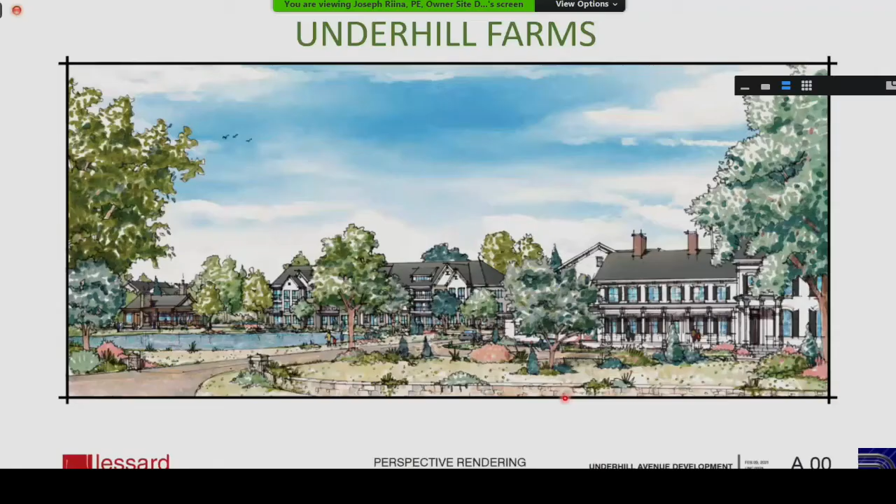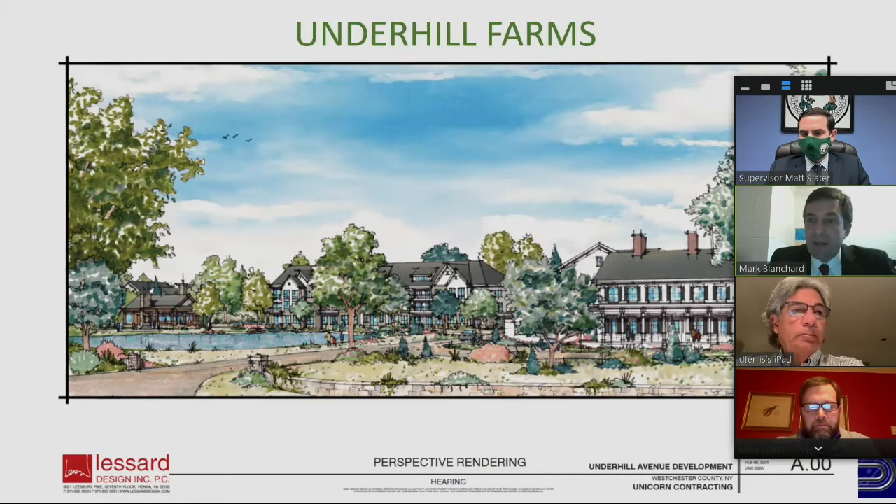The reason why I say I think it's interesting is our inspiration goes back to 2010. We're taking one of the goals that was set forth in the Yorktown Comprehensive Plan as amended and adopted in 2010. We're going to be showing you a walkable community in close proximity to the Yorktown Heights downtown business district that's meant to strengthen that district. We're going to be showing you a project that seeks to maximize the preservation of existing open space while also offering new recreational opportunities and open space that will be accessible to the public. We're going to be showing you soon some other amenities that the project is going to be offering to the town, including one very special amenity is the preservation of a locally significant historical structure.

I'm very proud to be a part of this team that's with you tonight. As Supervisor Slater stated, we have Joe Riina, our project engineer. We have Phil Grealy, our traffic and roadway improvement engineer. Christopher Lessard is our project architect. They will all be speaking. And finally, Paul Guillaro, the managing member of the project owner and sponsor, will be wrapping up our presentation with some specific project benefits and other issues.

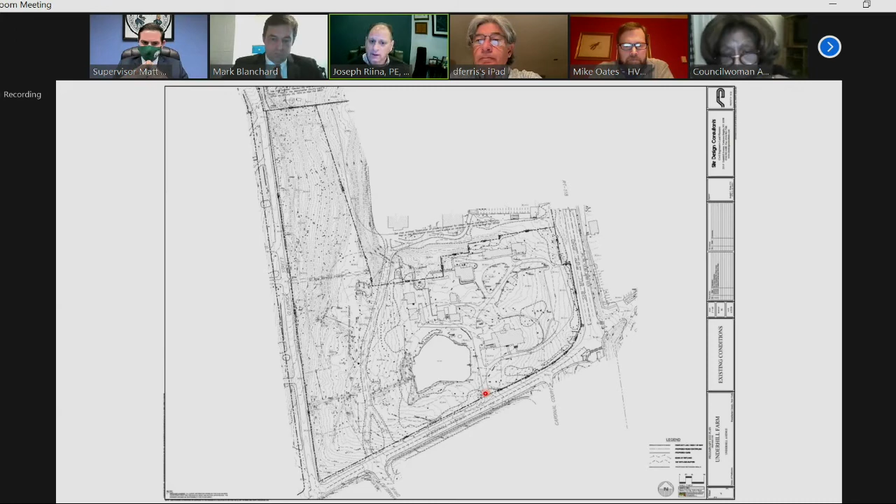This is the topographic survey of the property to give you a little more context and detail as to what we're talking about. Here's the drives that I spoke about, the parking area, the buildings. This is the main building, which is going to remain.

Here is the pond. There are some small wetlands on the site—a wetland here, a wetland in this location, and then there's a watercourse wetland whose source is the drainage system in Glenrock Street. It runs basically west to east and feeds the pond.

In a later slide, I'm going to show you how we're going to maintain and enhance that feature.

The wooded area of the site, on the west side, is bisected by the original fire road that was constructed as a secondary access to Beaver Ridge. We will be eliminating that, but we will be reconstructing it in another location and continue to provide that secondary access to Beaver Ridge.

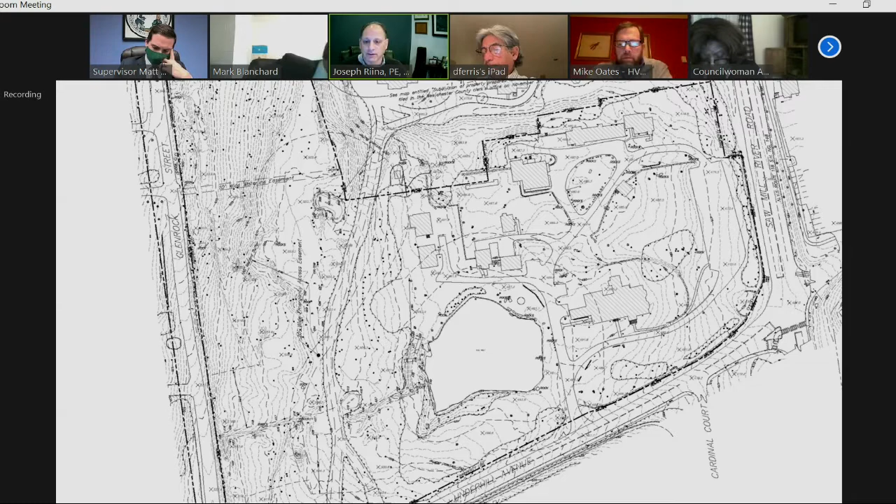To provide some context, the project site is adjacent to other multifamily projects that were previously built. To the south, you have 4 projects, which again are multifamily, ranging in density from 7.2 units per acre up to 12.3 units per acre. To the north, you have Beaver Ridge, which is 18.3 units per acre. Our project is going to be 12 units per acre.

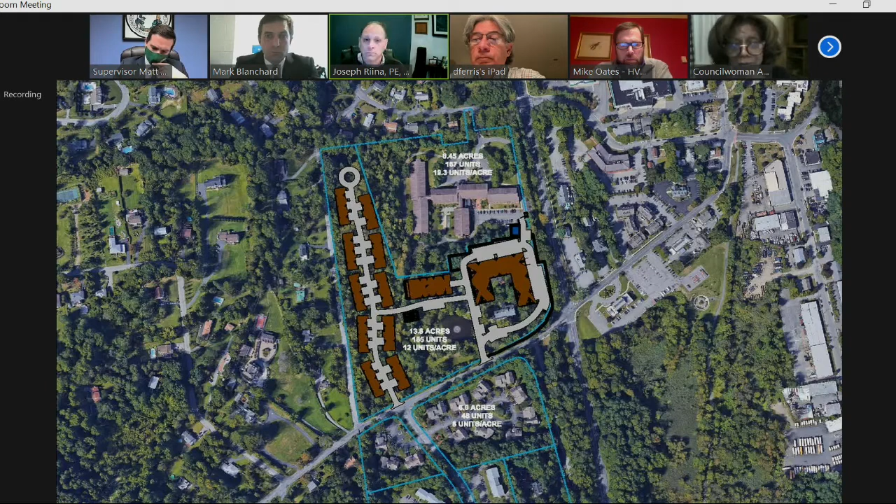So the proposal before you is a mixed-use development consisting of 165 residential units and approximately 12,000 square feet of retail or commercial space, which doesn't include the use of the existing residence, which Mr. Guillaro will take you through a little bit later on.

So the project is going to be developed in 2 phases. The first phase is the west side of the property, which includes 50 townhouse units. There will be a separate entry drive for that section of the development, terminating in a cul-de-sac.

These units along Glenrock Street that back up to Glenrock Street are all 6 units per building, and the buildings on the opposite side—these are uphill units, these are downhill units, we're calling them—are going to be 4 units per building.

As you make this right turn here, this is going to be a condominium building containing 30 condominium units. There will be parking underneath the building as well as some parking across, which will also be shared by and mainly used for the clubhouse amenity with a swimming pool for this first phase of the development.

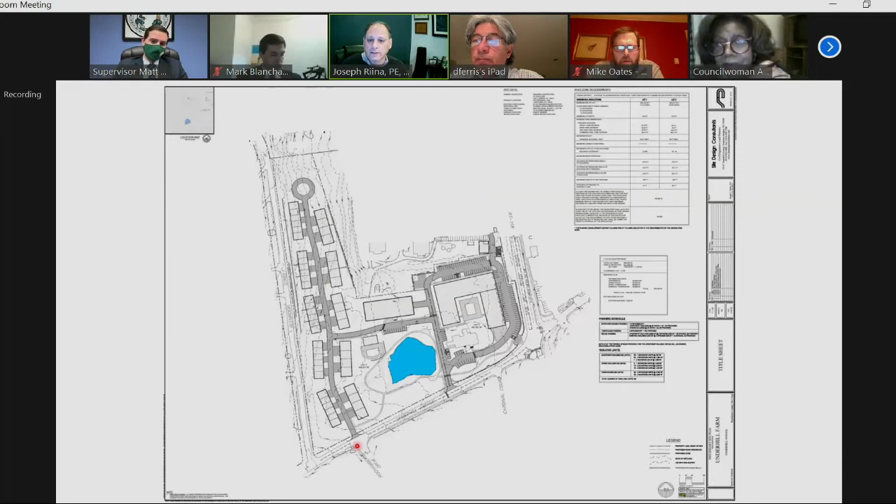This is just a planimetric view of the site. This is the existing main driveway entrance, which I spoke of. Just to give you a view of this and the way it looks now, and it's going to be enhanced and even look much more attractive once the project is complete.

At the corner of 118 and Underhill, there's an existing gate, a wrought iron gate and fencing there. This is the area where a plaza will be created. This will also be a connection point from the site over to and across the intersection where there's an existing pathway, and Phil Grealy will get into that a little more and get you over to the town hall side of the site.

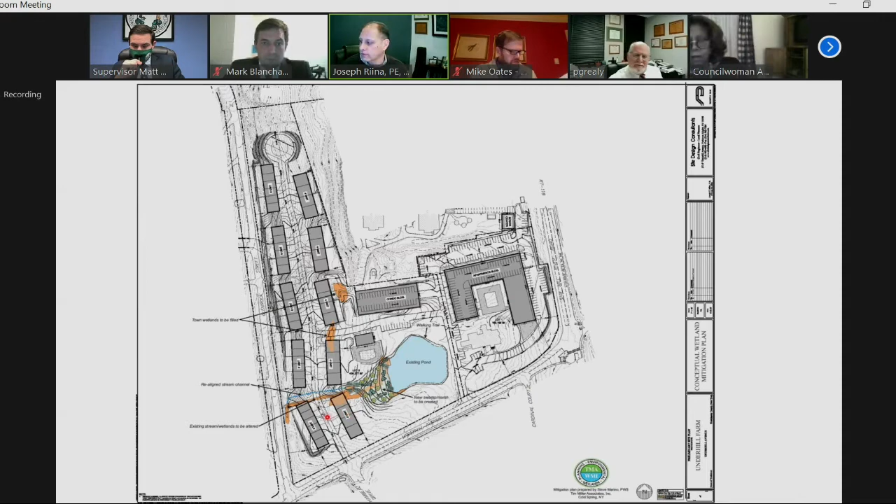Before I get into that, let me mention one other thing, just for your information. This is a preliminary mitigation plan to show the reconstruction of the water course and the new wetland that will be created over at the head of the pond here on the west side.

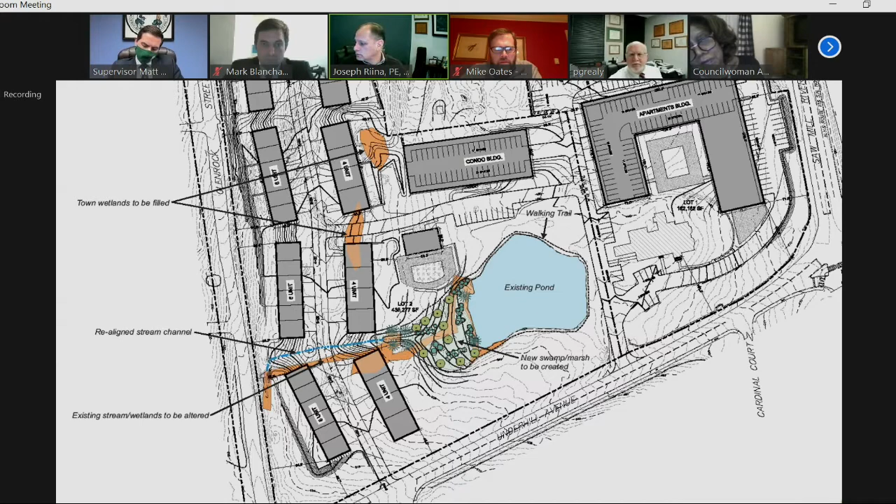So we are in the process of finalizing a traffic study. Just very briefly, as Joe stated, pedestrian and vehicular connectivity here is very important. The upper portion of this drawing in the northeasterly corner of the site is where the connection for both pedestrians and vehicles would occur, connecting to Beaver Ridge and where the new senior center is.

So there would be some traffic control and pedestrian accommodations made on the site to accommodate that. As Joe indicated, the site is going to be developed in phases. So the first phase is 80 condo townhouse units at the western portion of the site. In that vicinity, the access would be aligned opposite Rochambeau Drive. To give you some feeling for what 80 condo townhouse units generate in terms of traffic.

On a peak hour basis, development of that size would generate about 55 vehicle trips, okay? And to put it in context of the intersection of Route 118 and Underhill Avenue, that intersection accommodates about 1,500 vehicles in a peak hour today. When we talk about traffic, we focus on peak hours, morning and afternoon, in terms of both commuter traffic and traffic generated by a site.

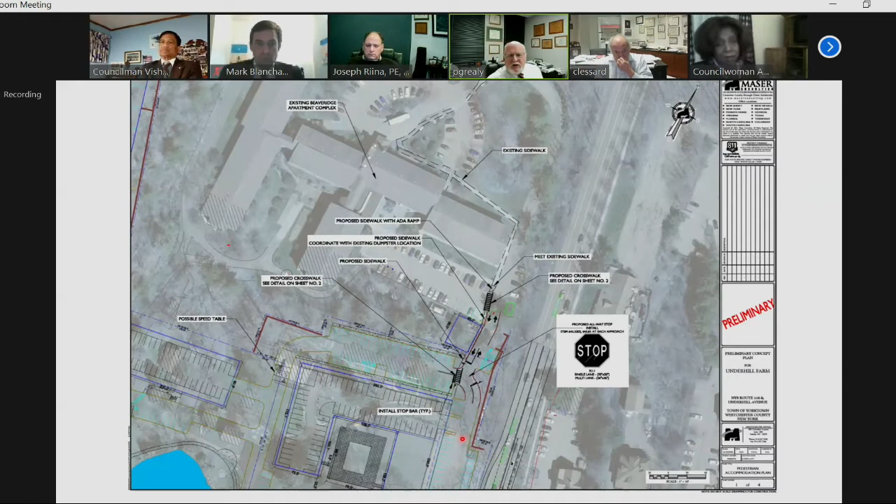So this is the connection back near the senior center. In purple is the proposed senior center. There would be a vehicular and a pedestrian connection to Beaver Ridge, handling local traffic from the development and the pedestrian traffic.

Joe, if you could go to the next drawing. And in the vicinity of sheet number 2, you're on sheet 4. On the left-hand side of this drawing, we are showing a new crosswalk, just to the west of the main entrance that serves the site today, together with what we call an RFB, a rapid flashing beacon.

It's a pedestrian activated flashing signal that would allow pedestrians to cross to the sidewalk on the south side of Underhill Avenue. It would also allow people living on Rochambeau Drive and Cardinal Court, if they wanted to come over and enjoy the amenities or just walk, this connectivity as a pedestrian path would tie into the improvements around the pond and get you over to the renovated, rehabilitated existing building, which would have some low generating traffic uses associated with it.

So the first phase would be traffic signal improvements and pedestrian enhancements, and some sight distance improvements right now at Rochambeau Drive, since there are sight distance issues exiting there. There's some clearing of brush and grading that would have to be done in association with construction of the access to the condos and townhouses.

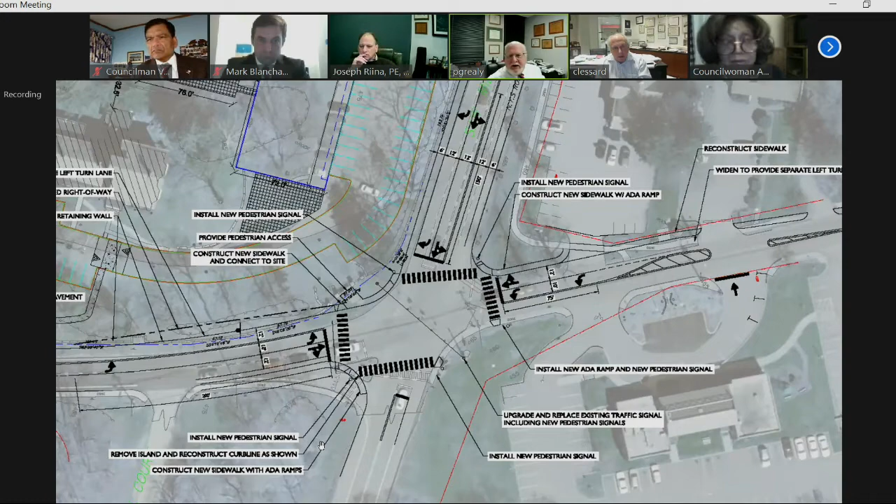If you could just zoom out a little bit on this drawing, so I can describe it better. That's perfect. So what this plan does is widen Underhill Avenue along the site frontage in order to develop a separate left turn lane, as well as an opposing left turn lane on the town hall side.

This plan would be done with either existing right-of-ways, town-owned land, or land owned by Soundview as part of the Underhill development. So there would actually be some land dedicated to accommodate this type of improvement.

This improvement would replace entirely the traffic signal. It would tie in pedestrian crossings on all approaches to meet DOT current standards. Right now, the predominant movements at the intersection in the afternoon are left turns from Underhill Avenue onto Route 118 towards the center of town, towards Triangle, and in the morning and even the afternoon, a heavy southbound right turn flow from 118 onto Underhill Avenue.

Right now, people use the shoulder to make that movement. This plan would develop a full right turn lane to separate out that flow and replace the signal, providing increased capacity. This improvement, with preliminary estimates over $750,000 to accomplish, requires some reconstruction of portions of the stone retaining wall along the project frontage.

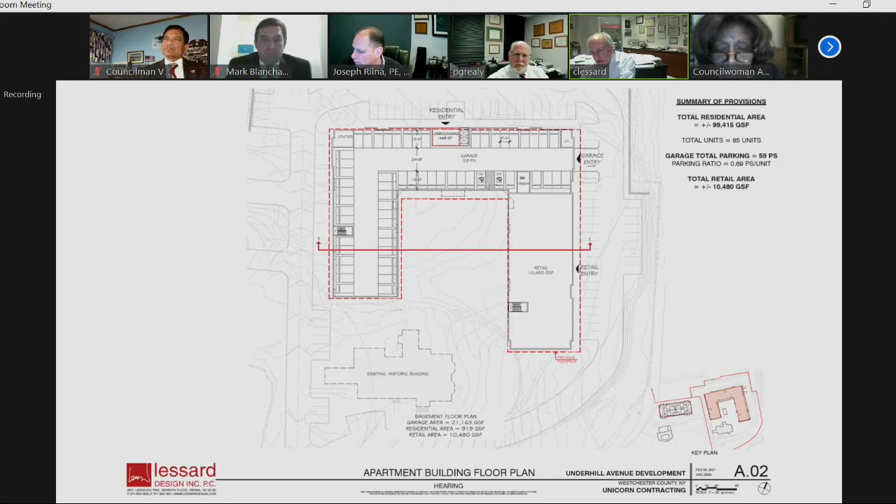I'm going to try to be faster than the other people. The amenity space here is pretty significant—each product has really a different amenity. This one shows the central two-story volume space, which is the amenity in the middle of the building. We have an outdoor pool set up, and plenty of amenity inside, like a club room and all sorts of facilities, fitness and things of that nature. Also, the scale of the building is really 3 stories with a basement.

The rest of the buildings in the project are either 1, 2, or 3 stories in scale, so it's trying to fit in and not feel like a monolithic project-type answer to a site. We don't typically do buildings this small, where we're doing 30 units in a building, and this one's 85—usually our buildings are larger, and also taller. So I think this sets the tone of what reinforces that hamlet-type feeling you have throughout the community.

Hit the next slide for a second.

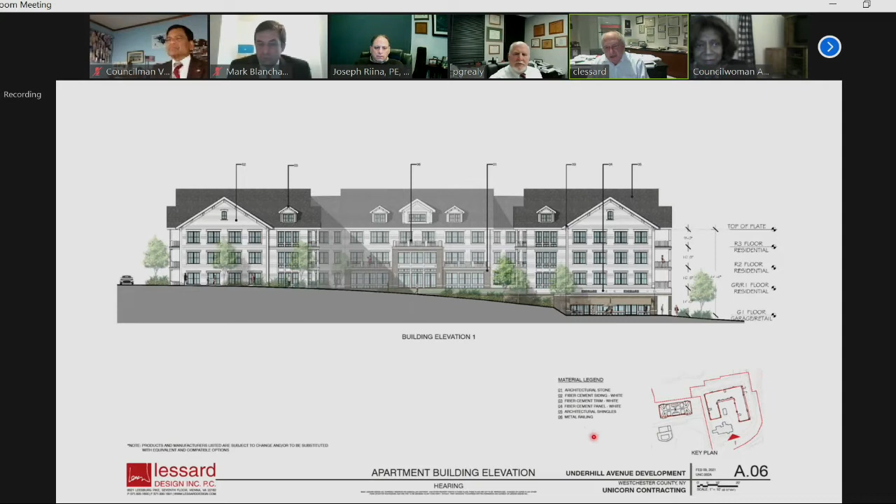Before you go, right down here is a key that shows where things are located. It helps you understand how things relate to the house, to the pond, and also the condo club room.

It shows the grade, how it steps down to the right, where you can enter with an underground parking garage. There's been a lot of effort to make sure the parking has been hidden so you don't really see the impact of it.

We've tried to make everything pretty much age targeted, with uphill and downhill sites. What Joe didn't mention is related to the street next door, which is Glen Rock. Those are uphill units, so that's really 2-story elevations along that street edge.

This is an example of a downhill unit where we're trying to get a master bedroom down, giving people choice in Yorktown Heights for something they probably don't have easily - getting everything on the first floor, with additional rooms upstairs, designed really for an empty nester.

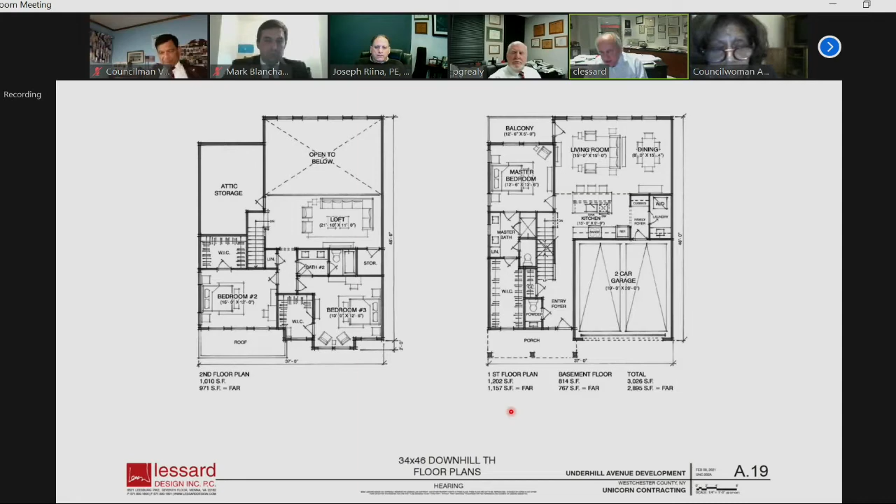Even though I don't have an elevation here, we have - if you go back to the site area, so you could point to where the condo club area is. Don't have to go to a site plan, just a reference to one of the other site plans. Go to the site plan? Not to yours. You could go - why don't you go to the condo building?

Right there, you see the location of the condo building, but I'm pointing it out in order to talk about the condo clubhouse with the pool. That also has amenity for the residents in the condominium and the for-sale regime.

And it has a WeWork type of environment. It's going to have kitchen space, offices, so you can have conferences. You'll have fitness space, and you'll go out to the pool area.

It's also a large outdoor deck space, so they can sit and eat and look over the pool. We'll also have outdoor eating, where there's going to be grills and things of that nature placed there.

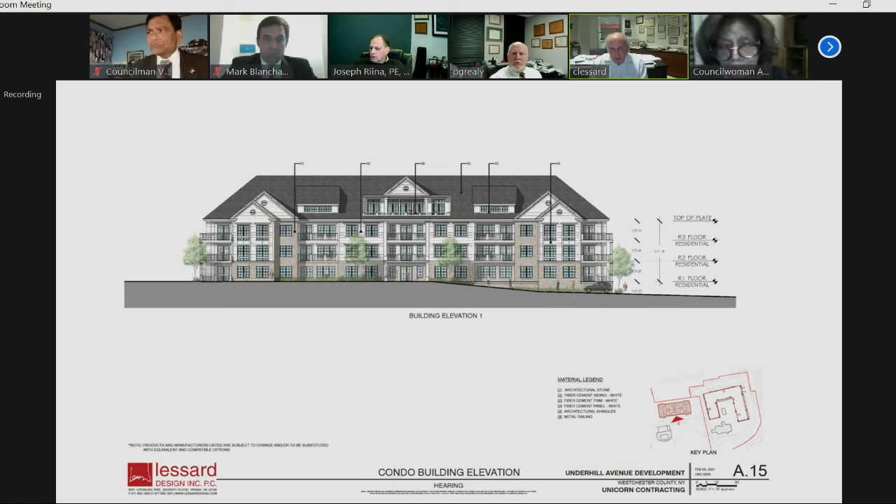Paul, you want to go next? Actually, go to the slide towards the end. Joe, just a perspective that shows. Keep going.

Next one. Cool. Is that? Oh, Joe, hit the first slide. Yeah, that one. Okay, so Paul can talk about the building and the setting.

Okay, thank you, Chris. Good evening. I am Paul Galaro, president of Unicorn Contracting, the developer of the Underhill Farm project. You may be familiar with the Caremount project we recently completed across Route 118 from the site.

During Caremount's grand opening, I was intrigued by numerous seniors in attendance who spoke of a need for senior housing near the downtown area. This has become our main goal for this project, to provide senior housing in many different types of living units, such as apartments, condo flats, and townhouses. Of the 165 units, 135 of them will be senior friendly, and over half will be designed specifically for seniors.

Another goal was to create access for all Yorktown residents who would be able to enjoy and experience the historic main building, the pond, and the grounds on the property. I would like to make a few points and highlights of this project. Our plan is to invest over $1.5 million in restoring and enhancing the existing historic building, pond, and grounds.

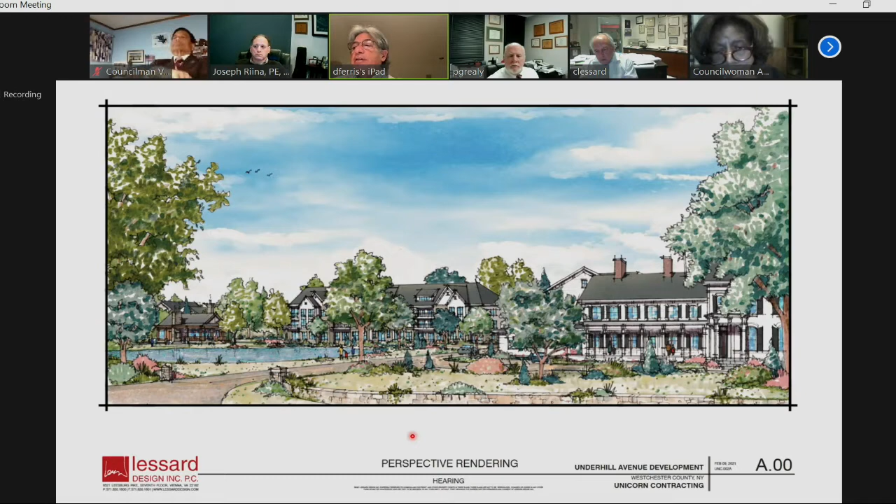Lastly, this project will contribute over $1 million in additional tax revenue to the town of Yorktown. In summary, we will be providing at no cost to the town access to the grounds, the main building, senior center parking, and financial support for the improvement of the Route 118 Underhill intersection. This concludes our presentation, and we are here and available for any questions.

Thank you, Mr. Guillaro. Any questions from the board? I think we also have John Tegeder and Robin Steinberg from our planning department with us as well. I don't know if they have any questions, but of course, feel free.

I had a couple of questions. Is it possible to take the screen share down so I can see who I'm talking to? Take the share down? If you guys don't mind, does anyone have a problem with that? I do. There Ed, we go. Too bad timing. Too late.

So, hello everyone. Thank you for the presentation. I'm sorry, Paul, I have to apologize, I sort of missed what on the number. You said there were 165 units. How many of those were you dedicating towards senior living?

Well, yes, there's going to be 135 senior friendly units, which means a senior can live in any of those 135, but half of them, roughly 80 to 85, will be units specifically designed just for the seniors. I definitely like the WeWork area too, because that might appeal for some of our kids who we hope would move back into the area as well.

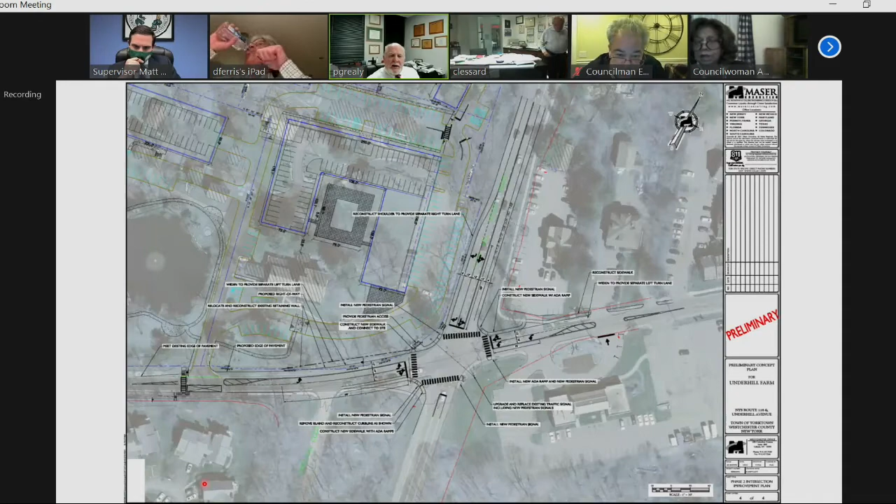Also, we're trying to preserve the look of the retaining walls along the property, both on Route 118 and on Underhill. And the other complication is that the intersection isn't square—there's a skew on Underhill Avenue. Trying to create a roundabout with enough separation from the north leg of 118 and the easterly town hall leg becomes very difficult to fit, and still get both of those approaches to function.

Okay, I see it. I was just curious because I know you've come to us before on other projects in the hamlet and beyond, and roundabouts have been a point of conversation.

I'm not going to say never, but we have grading issues along the town hall side because the grade drops off there. The most complex item is the proximity of the north leg and the east leg—once you put a roundabout in, they're too close to function. Also, positioning a roundabout would take up more of the area where the old gate entrance to the property is.

So, never say never, but this is what we came up with. We did look at a roundabout when we examined the grades and the proximity of those two legs, and moved on to a more conventional intersection with full pedestrian amenities, crossings, and ADA compliance. That makes a lot more sense than a roundabout, especially with the pedestrian crossings—though we don't know what our friends at DOT might say, but I wanted to make sure I understood. Yes, we did look at it, so good question.

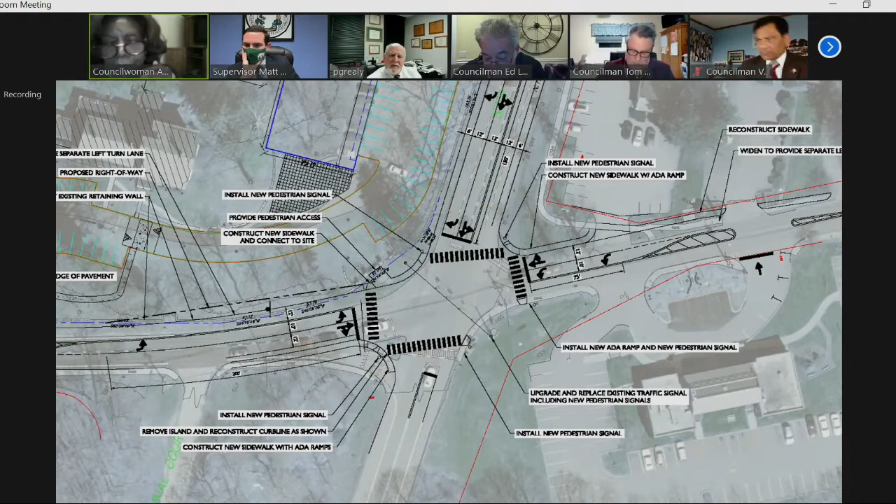I'm just wondering if you ever considered bringing it to the town board for a straight rezoning instead. Right now, we obviously just wanted to go under the current overlay—it sounds like it would be more user friendly, but I'm not saying we wouldn't be open to it.

John Tegeder, are you still on here? All I see is the plan. I am on, boy, that sounds right, I'm on. What street are we talking about again? I just got a couple of questions you might be able to help us with here.

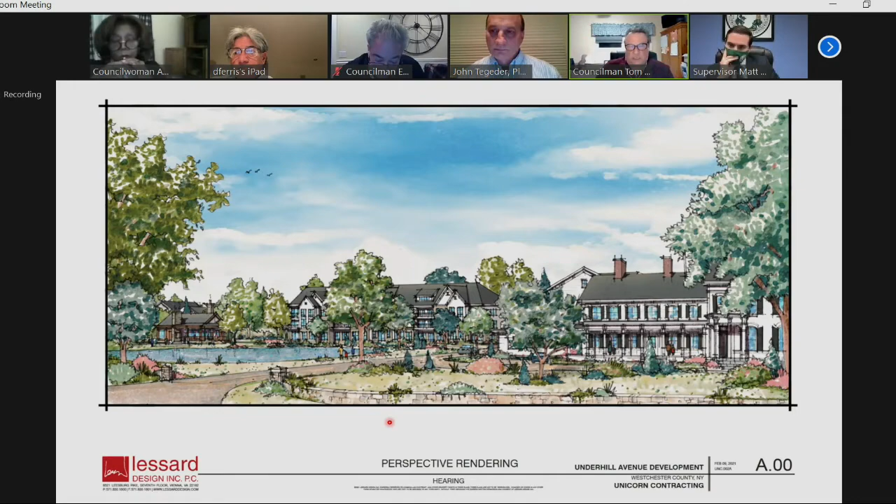The property north of the Sound View is approximately 20 acres per unit, right? And to the south it's more like 8 to 12. Yes. And to the east is basically commercial, correct? That's correct. Now, the Sound View—or I should call it by its proper name, the Underhill Farms project—would be generating about 12 units per acre. Am I correct in my assumption? Right, yep, okay.

So why wouldn't we want to put this in the overlay district?

Why wouldn't we want to do this as an overlay with the commercial under on the first floor in that particular area? I think the overlay district adds a lot of flexibility. Number one, it allows you to have the retail component. It also allows the town to talk about historical structures and determine that certain of those structures should be saved and reused in a particular way. Then there's the recreation component, and a bit of a cultural component, along with the historic structure, but also the pond, in that it becomes an amenity that can be used by the public.

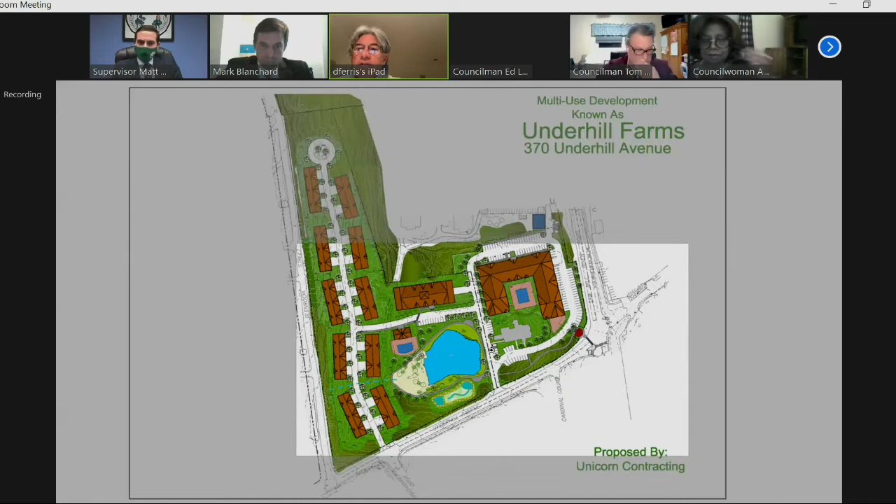The main building, and then also the public portion of it, which is like the trails that we saw going around - yes, the pond, the access down to Route 118 and Underhill. It's roughly around 3 acres. It will be walkways, sitting areas. There's probably going to be a bridge, not shown here, but right there - we're going to need a bridge over the stream. So it'll be very scenic, and it'll be the focal point of the development.

I guess to be more pointed though, it's not going to fall to the responsibility of the parks department.

Please let me in - question mark. I got locked out. My computer froze. Ed, you're unmuted. Mute yourself.

I'm sorry, Mr. Guillaro. So as I was saying, but for that area, yes, the town will not have to maintain anything on this site. Okay, thank you, that's what I wanted to ask. Sure, I want to make sure that's clear for the board, but also for the public.

I know Councilman Patel had a couple of questions. Councilman Patel, did you want to ask? You're muted, Councilman Patel. Unmute yourself, Councilman Patel, you are muted. Can you unmute yourself, please?

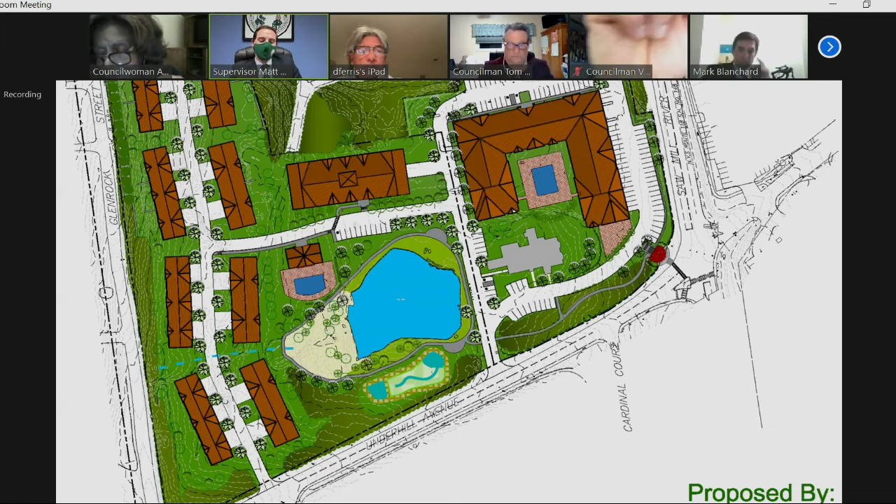Thank you, sir. Okay, let me tell you, since 18 years I have been to that building. There used to be some public meetings in those little shade-like buildings, and it was cold. I think it was given free access to those buildings. And if I'm really - my memory is leaky now. But since the school opened, I have taught in their school how the computer technology was created right here in Yorktown, until they closed down last year, okay? And into that building, many times I have been there. It was, some places there, they required more work and all that. So it's a beautiful building, and some things I like it.

But let me just say something else. Those fancy buildings, to me, are just like a Lego - these designs are very common all over the world. How much does it cost to live there? Are those the privately owned units or rental?

Which area are you talking about? I'm sorry, the main building - there are the condos, will they be individually purchased or rental? Okay, so the main building, the apartment building, which is closest to Route 118 and the existing building - that's apartments. On the other side of the main road as you drive in, that's all going to be condos. And there's going to be one building that's flats - condominium flats with an elevator - and the others are going to be townhouses.

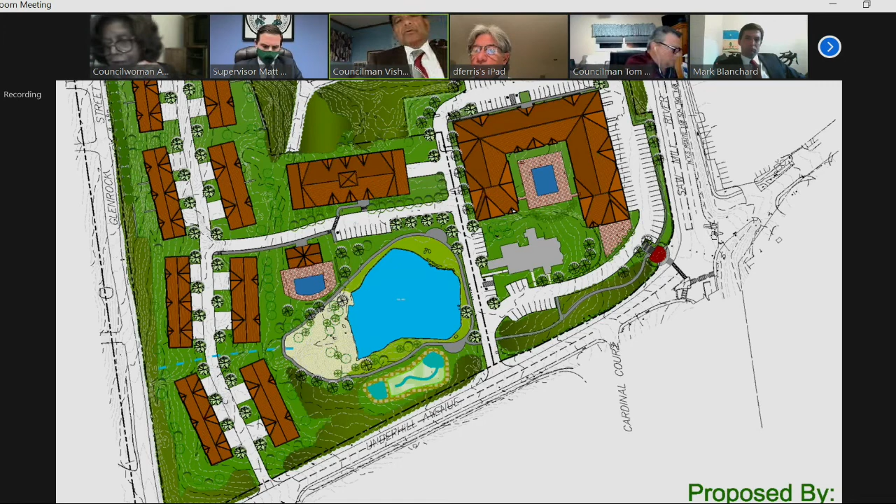And is that a rental unit or individually, privately purchased? Those are going to be - the condos are going to be privately purchased, and the apartments are obviously rentals. Yes, and how much money would somebody have to - I don't think I'm going to buy it, but how much money would you need to rent or purchase that unit? Is there any estimate now? We really don't have any estimates at this time.

I have to apologize, I had to go on my other computer. I got kicked off. I had two follow-ups to some of the questions, Paul, that you answered for Councilman Diana. Sure, hold on, Councilman Lachterman, hold on one second. Councilman Patel, are you finished with your questions? No, let's learn more, I want to learn more. And I want to make sure you were finished with your questions before Councilman Lachterman. Yeah, okay, go ahead. All right, thank you, go ahead Councilman Lachterman. All right, I was writing things down that we just wrote, but everything got a little messed up.

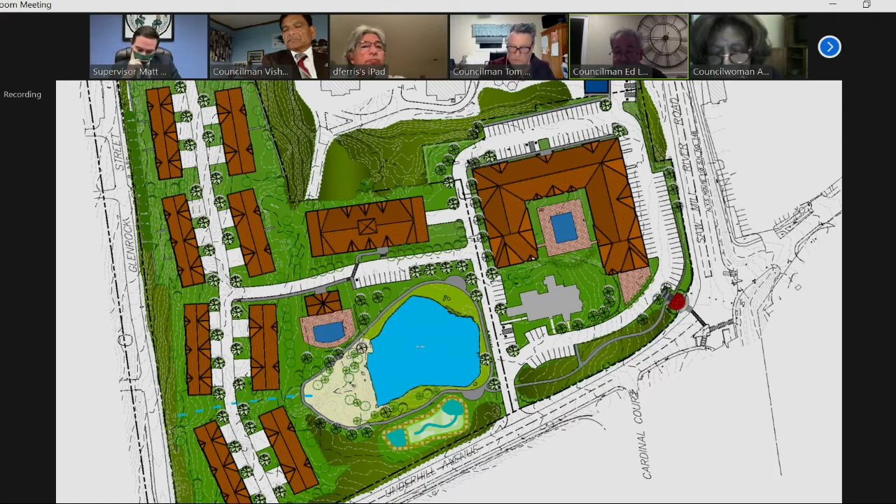Well, actually, I'm sorry, they're not follow-ups for Paul. The follow-ups were on the John Tegeder questions, but Paul may have an answer on one of them. So if we don't, John - if we don't get the 30 parking spots, I think it was, for the senior center, what does that do to that project?

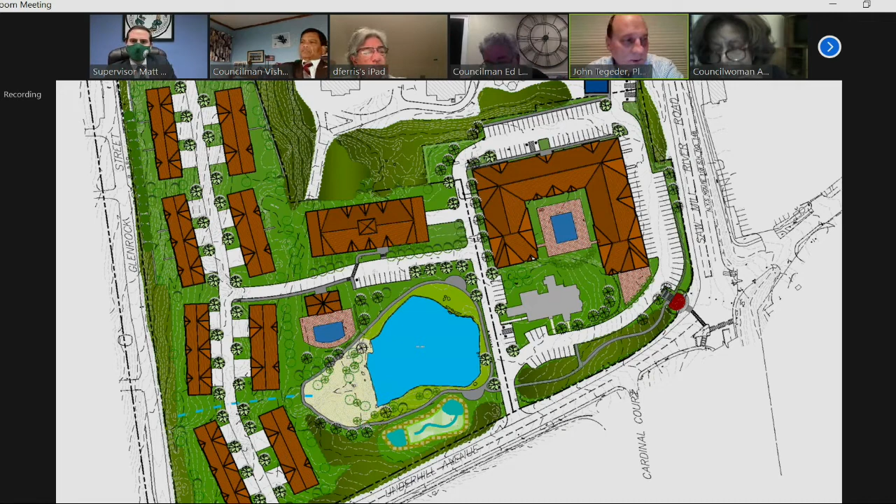Well, I had some discussions with the rec superintendent and Patty DeMarsh, who takes care of the Albert Capellini Community Center, in which most of the senior clubs meet now. The initial determination was that on some of the heaviest days there could be about 50 cars needing parking spaces. So we preliminarily determined that you would need at least 30 spaces available on a regular basis for the senior center to work. If you don't have that, I don't think the senior center will function properly.

Yeah, because I was concerned. I've been to a couple of the AARP meetings as a liaison - not that I'm a member, which I am - but the lot would get extremely full over there.

And John, I know a big part of this, and Paul might be better served not answering the question per se, but under the current zoning, I think I was under the impression that if they wanted to keep the zoning current, they could take down the historical aspects of the property without an issue. There's no protection written in at that point - no protection for any building other than legislatively adopted landmarks - to prevent it from being demolished by an owner. No. Okay, but that's a building permit application, which is basically a ministerial action.

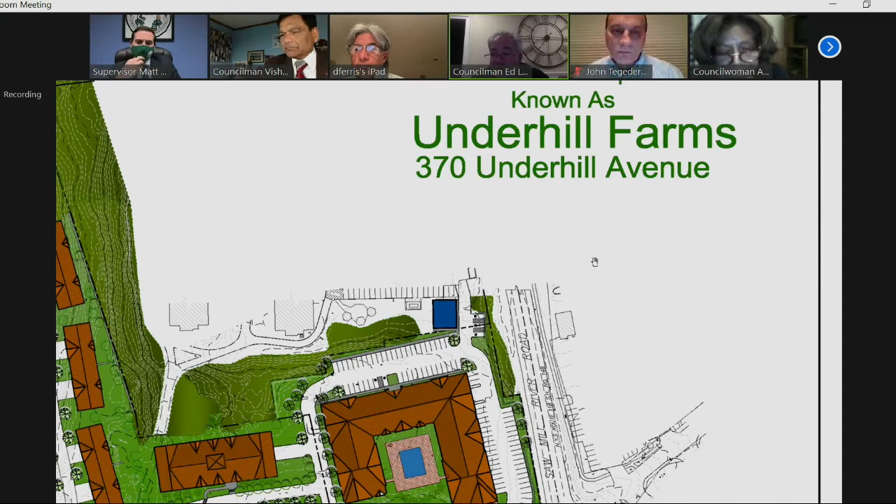I think, and the reason it came to mind, Paul, is that it's commendable that you want to preserve and keep that land, that historic building. I know it's not landmarked, and there are probably too many changes in it to make it landmarked at this point. But the commitment to spend close to $1 million, and then the upkeep on it, it's commendable. I want to thank you for including that in this plan and trying to preserve it. Not everyone will take that viewpoint on the money well spent.

Thank you. Can I say something? Yes, Councilman Patel. Suppose the town wins $10 million in the lotto - just a hypothetical question - will you sell the land back to the town? No, I'll give it to you. Me, I'm not going to hang on that long. When time comes, I gotta make room for others. I am not too far away, in my age. Okay, but things can happen. People - they could. You gotta have some.

Why would we want this large piece of property? We can't even take care of the property we have currently. So it's that a developer has the property, not us. And I think also, did you mention about $250,000 a year to upkeep? I don't. Yeah, but it's going to be more than that. More than that. I just don't see how we put that on the backs of our taxpayers. Yeah.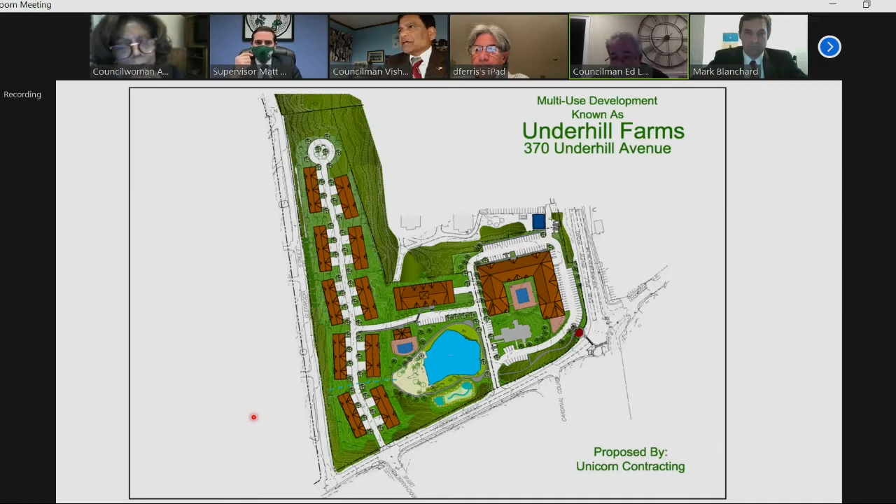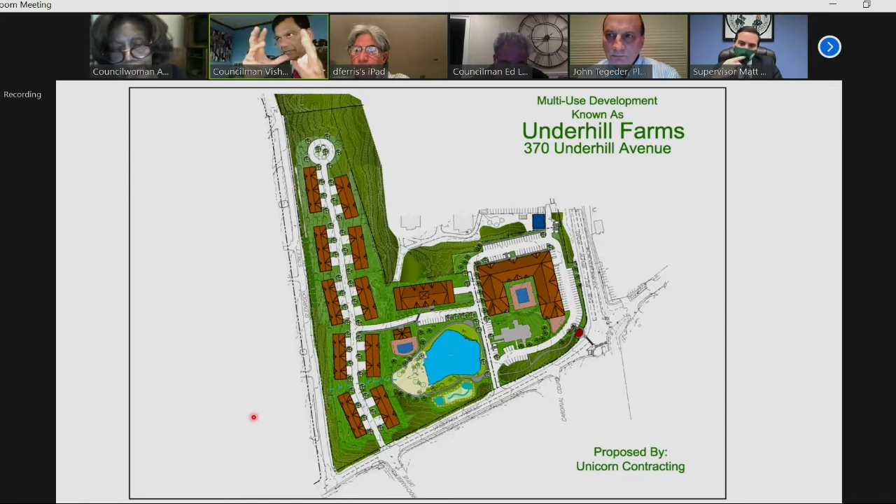So I have a question for John. May I ask you just, John Tegeder? Okay, John, how does this building architecturally fit into surrounding buildings on those couple of streets around there, those apartments, like if you look from the sky? The proposed buildings? Yeah, well, I think...

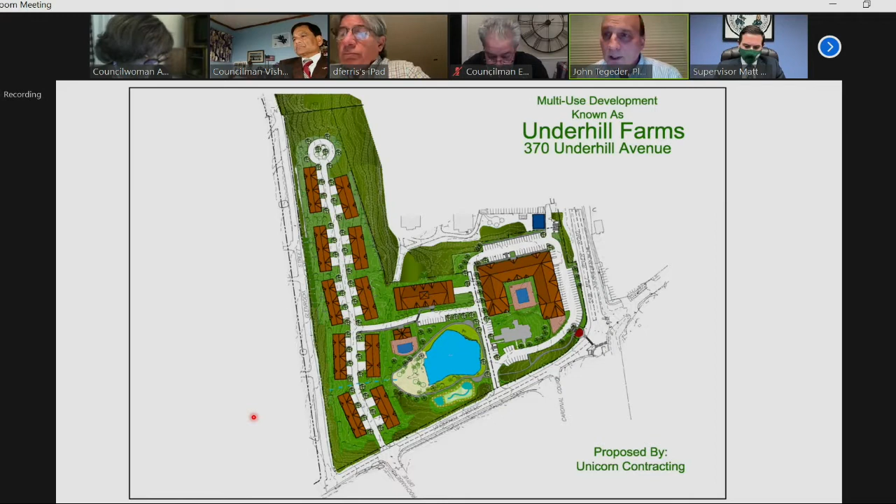If you look from the sky, I think they fit in terms of units per acre, which we've shown. They are in the proper area already selected by a number of multi-family developments, namely Beaver Ridge and some directly to the south, which makes sense because these are transitional properties that move from a commercial area to a single family residential area, providing that transition and boundary. That way it makes sense. Architecturally speaking, the designs are very pleasing. I think they replicate and reminisce of the architecture presented in the Underhill house itself. I think they are the very type, in terms of material and architectural form, that we see here and desire in Yorktown more often than not. I think it's a very sensitively put together grouping of buildings that fits in well with much of the buildings we cherish most here in Yorktown, whether historical or more modern.

Thank you. Any other questions from the board? Nope.

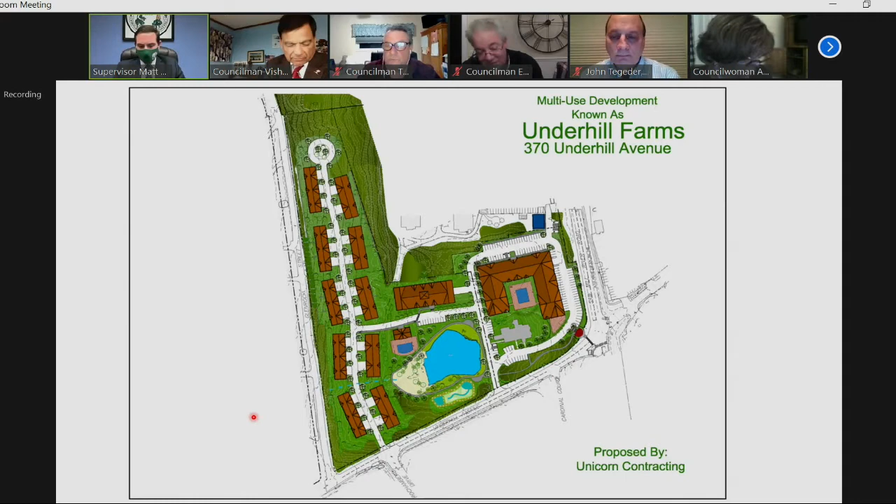No? Okay, well we thank you, Mr. Galero, and your team for the presentation tonight. It answered at least many of the questions that I've been receiving in my office, which I'm happy to point people to, and I hope people were listening and watching and will hopefully get the answers they were looking for, because I know there were many questions about it. It was very nice to have you here and be able to provide the presentation to us. Thank you for your time, appreciate it very much. Take care.

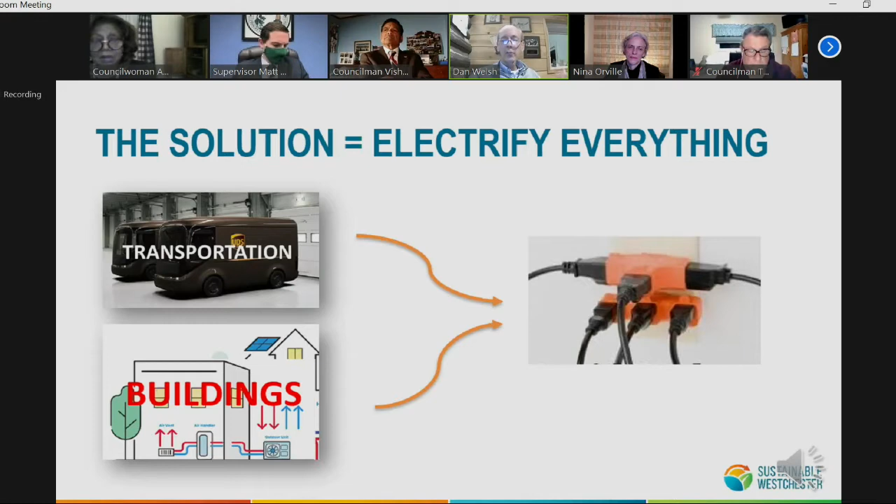Very important - this is a conversation we have on the phone almost every day - is an educational piece that people's bills are made up of essentially two major pieces: the delivery, which is always by the utility, they figure out how to get the electrons to your door, and then the energy supply - that's you deciding who you want to pay to dump the electrons in the grid. Is it the dirty fossil fuel supply, or are you paying the clean energy supplier? So what we're doing is taking advantage of that opportunity to maximize our impact on the supply side, bringing you the benefits of these fixed rates and clean energy with that.

Our vehicle for obtaining the most favorable rates possible in the market as of our last renewal is an online reverse auction platform. We start out with a not-to-exceed price, set by indicative pricing we get, and say come in and start bidding it down. The suppliers bid against each other in real time, and stakeholders like you can actually sit in on the auction and watch it going on.

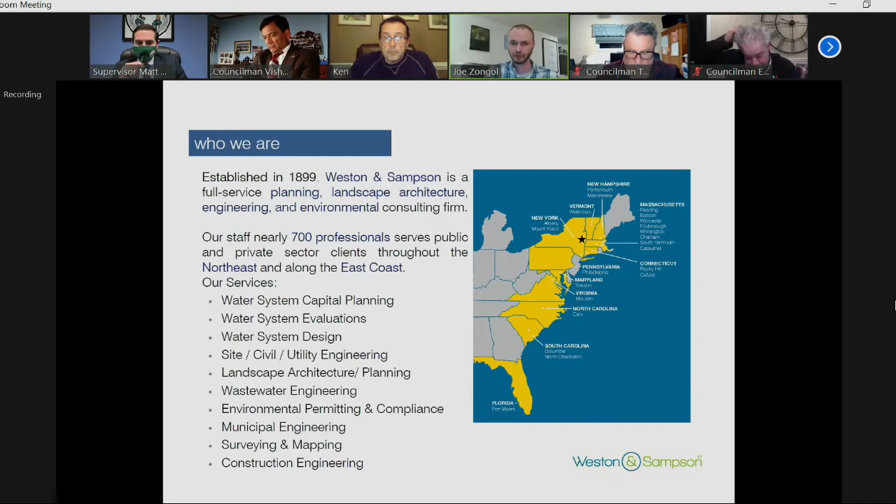What I wanted to focus on here, while we are a full-service firm, is more the water side. So we do a lot of water system capital planning, water system evaluations, water system design. Those are the types of things I've been talking to Ken about, trying to provide some assistance. We also do site civil, utility, landscape architecture, the whole suite of services, basically from project planning and feasibility through design, through bidding services, through final construction. So from cradle to grave for construction projects.

For hydraulic modeling, we have Ryan Fleming, who used to work in White Plains. He's now out of our Rocky Hill office, but supports us on a lot of New York projects. He's a New York PE with experience working with New York City DEP, and he's a water system expert, especially when it comes to water process and things like that. Ken's had the opportunity to speak with him on a number of occasions.

We offer a full suite of GIS services. We understand that you guys have that, and that'll be going towards the water model we're going to discuss, so it'll work well with the GIS system you guys have in place. We also have additional staff with a lot of experience in capital planning, including Jeff McClure with over 20 years, and also SCADA, which is instrumentation and controls, computerization of systems, to put it in layman's terms.

Jeff, you want to introduce yourself in a little bit more detail? Yeah, thanks Joe, you're doing a great job without me. Jeff Budrow, it's my 36th year anchoring our Albany office, and most of my career has been spent doing infrastructure projects just like the town of Yorktown, supervising an awful lot of the design and efforts we've made to improve and rehabilitate old infrastructure and design new infrastructure.